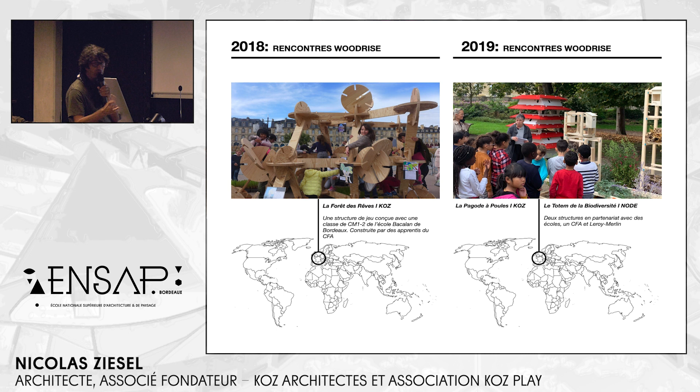Ça commence en 2017 avec plusieurs événements, dont déjà un workshop qui rassemblait des étudiants de l'ENSAP et des étudiants japonais. Ensuite, tous les ans, lors des rencontres Woodrise, des petits pavillons étaient faits, qui duraient une semaine dans plusieurs sites, avec à chaque fois un travail avec des enfants, que ce soit avec des enfants d'une classe CM1-CM2 en 2018, ou avec un collège et des apprentis en 2019.

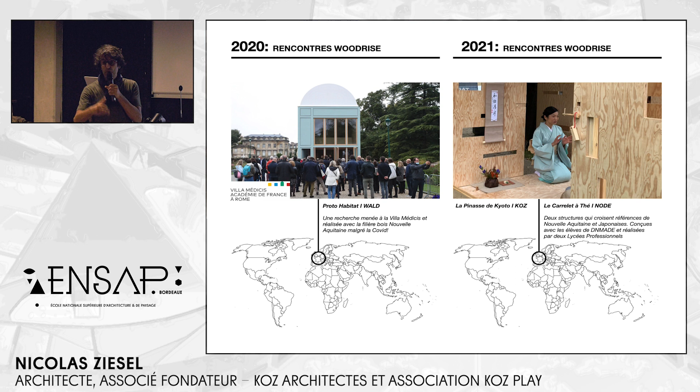En 2020, la rencontre avec la Villa Médicis autour de l'accompagnement par la dynamique Woodrise, par tous les acteurs industriels, ingénieurs, etc., de la construction du proto-habitat.

En 2021, à nouveau des pavillons réalisés avec des lycées professionnels, ce qui était aussi intéressant, et des étudiants en DNMADE d'espace. En 2022, on est parti hors les murs sur 3 événements.

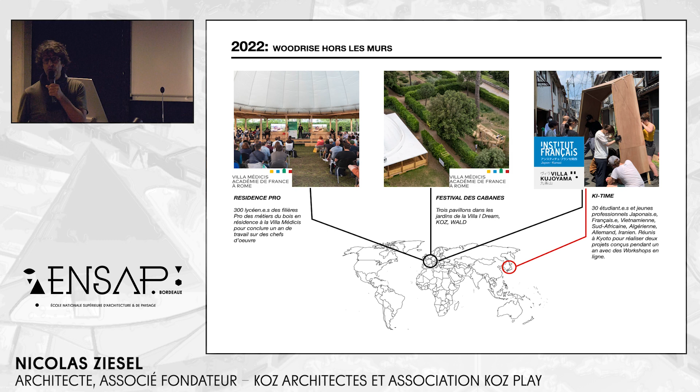Le gros événement était la résidence pro, avec 300 lycéens professionnels de la filière Bois de Nouvelle-Aquitaine qui passent une semaine à la Villa Médicis pour exposer les chefs-d'œuvre qu'ils ont réalisés pendant l'année.

Le festival des cabanes avec, grâce à tous les acteurs, 3 pavillons construits qui restent pendant l'été dans les jardins. Et grâce à Riichi qui est ici, Ki-Time, qui aurait dû se tenir pendant le congrès Woodrise à Kyoto, mais qui a dû être décalé pour les problématiques de visa.

Et à nouveau, des étudiants du Master Bois de l'ENSTIB de Nancy et des étudiants de plusieurs universités japonaises qui, pendant 15 jours, après un an d'échanges et de travail de conception en visioconférence avec le décalage horaire, assez acrobatique, réalisent 2 petites installations dans des lieux culturels français, à l'Institut français et à la Villa Kujoyama, une des résidences d'artistes de France.

Tout ça nous a amené, pour le retour à Bordeaux, à vouloir faire à nouveau accompagner le congrès par un événement de rencontre entre jeunes autour d'un projet, avec évidemment la dimension internationale de Woodrise.

Les participants viennent de 3 pays : des Français de l'ENSAP, des Compagnons, des Japonais et des Ukrainiennes qui ont réussi à venir passer les 15 jours avec nous, et qui vont maintenant vous présenter par équipe. Les équipes étaient toujours mixtes.

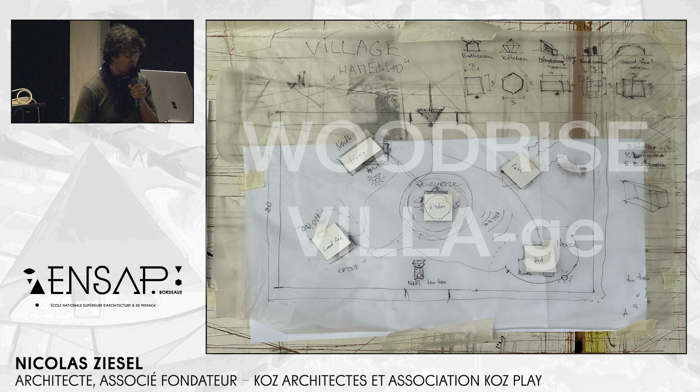Le sujet, c'est à la fois une villa et un village. Vous avez pu voir le petit village dehors, puisque chaque équipe a travaillé sur la thématique d'une pièce spécifique d'un logement, pour essayer de trouver une approche originale, adaptée aux situations d'urgence, ce qui a été un gros sujet avec les différents participants.

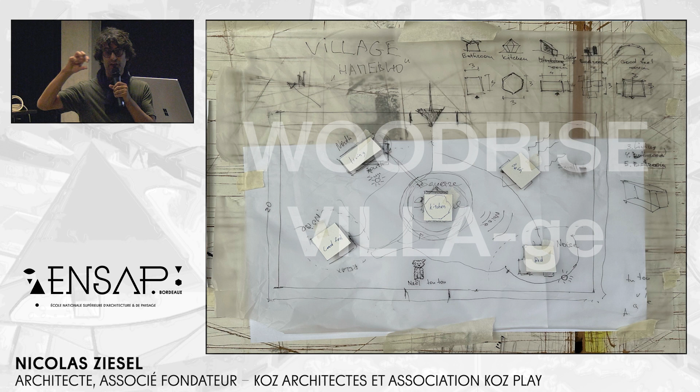Et puis à la fin, composer un petit ensemble habitable et peut-être transposable. On a déjà prévu la phase suivante, qui sera la réalisation d'une ou de toutes les propositions, pour les exposer à nouveau à la Villa Médicis et vraisemblablement aussi dans des communes des Landes touchées par les incendies. Alors on laisse la parole aux vraies vedettes du jour, qui sont les équipes.

Le workshop s'est tenu en 2 endroits. La première semaine, on était accueillis à la Philomatique, magnifique endroit, superbement situé, où on s'est senti très très bien. Et on a passé la 2e semaine, depuis lundi, à l'école d'architecture de Bordeaux, où l'accueil était tout aussi formidable, et grâce à la météo, des conditions absolument exceptionnelles de travail.

Alors, c'est à vous, je vais appuyer et c'est parti. Yes.

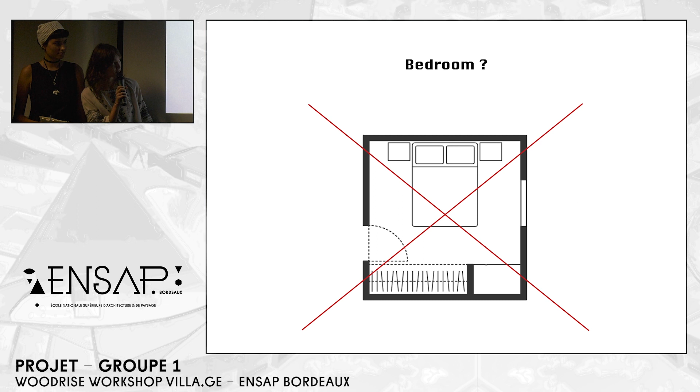So we are a team called Oui, Je, Maybe - that means yes, no, maybe, this is our name. Our team is from Japanese students, Ukrainian students, and French students. So we have different nationalities, different visions, and different experiences. This was a question: how to mix all of our cultures. The first question was, what is a bedroom? The average person would probably say that a bedroom is just 4 walls and a bed inside. But we decided to say no to that simple bedroom.

We tried to play with different levels in this main volume, and play with different layers. So the modularity is about making changes, and depending on the place, if it's a big gymnasium or a few small rooms, you can adapt the space using our modules. It's like an IKEA scheme that you use, making whatever you need for different families, different people, different cultures.

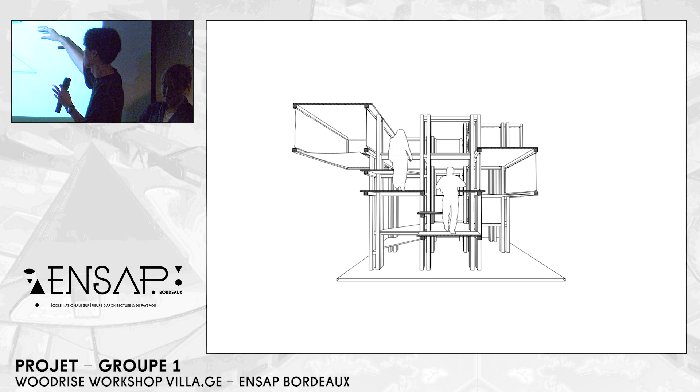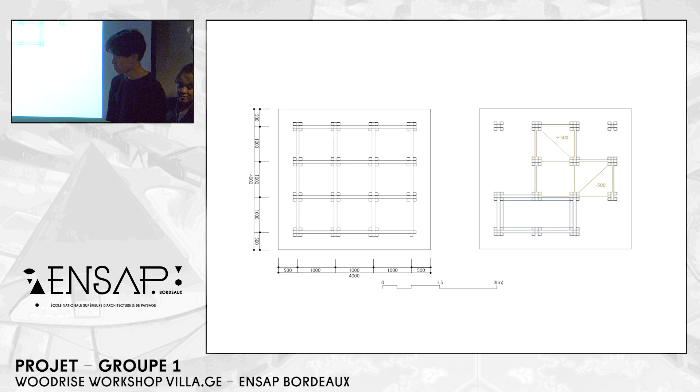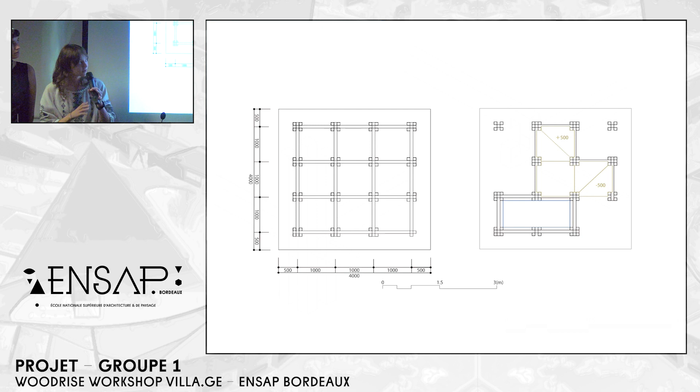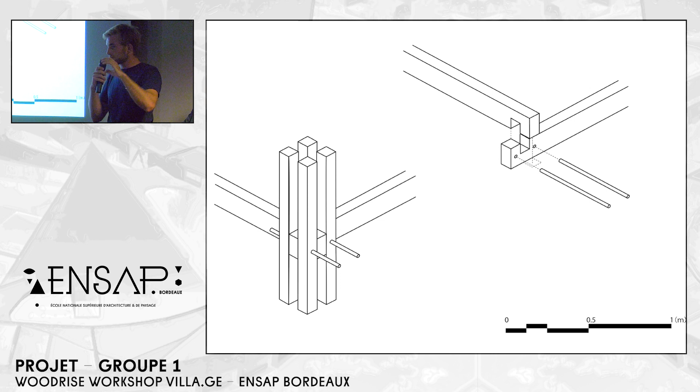This is a detail about the construction of the main elements. It's all the same poles and the same pillars, and it works one way or another, so you can use an element and use it somewhere else. The idea is to be able to construct it with only a few tools, and it's pretty easy to do, even at scale 1. It's pretty easy to cut and build at a large scale and with big series.

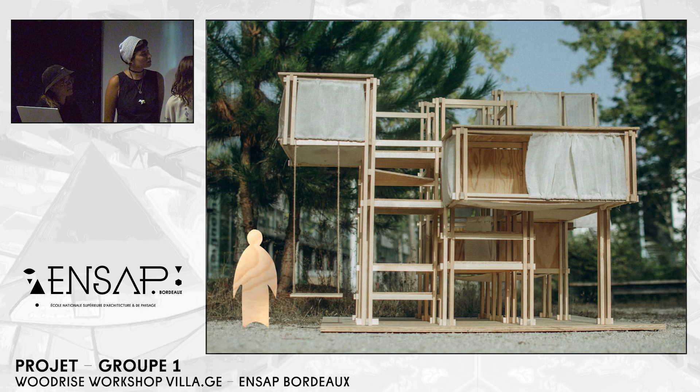This is Michel, the resident of our bedroom for now. I think he is enjoying our space in our bedroom. He can use it however he wants. Here you can see the different spaces that we created. That's not us anymore, okay. No, Michel, thank you.

In emergency situations, quick response to disaster is crucial. So we went back to the roots and tried to think about how to satisfy basic people's needs with as little intervention in the existing environment as possible. So we are ready to present our project.

Our team is composed of different students who come from different countries and different studies. We shared experience together and brought our own knowledge to add diversity to our project.

On the 24th of February 2022, the war began in Ukraine that changed the lives of Ukrainians forever. We have chosen this context because this topic is very current and requires immediate resolution, because many residents of Ukraine have lost their homes.

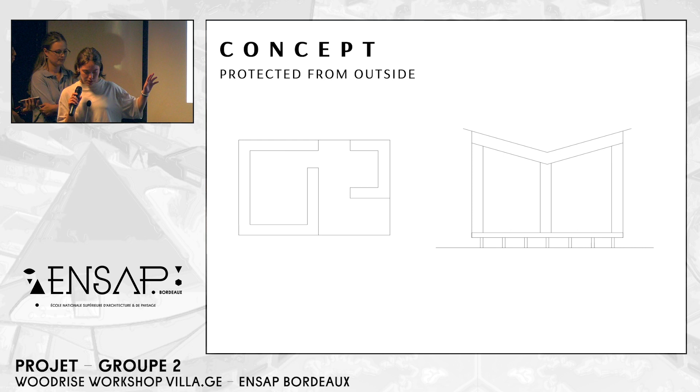The roof not only collects water but also provides light and energy. This form of roof facilitates the collection of water. In the shower area, there is a cutout in the ceiling that provides light, and on the roof.

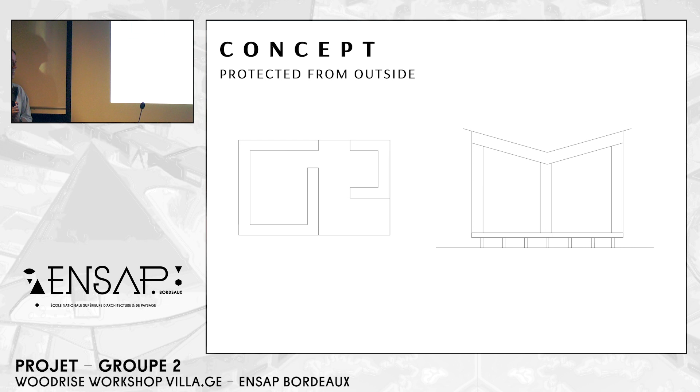To protect the room from outside, we use straw in the walls and roof panels. Straw is a very common resource, and it's also good for insulation and humidity regulation.

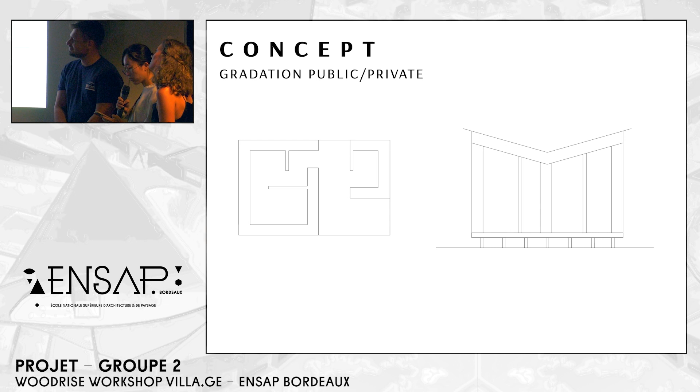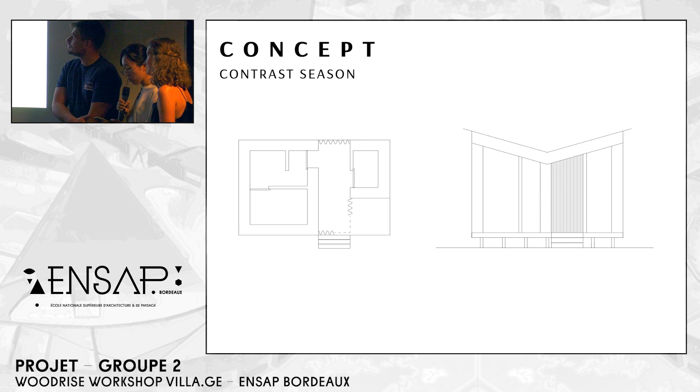As we explained, weather changes with the seasons, so we use some removable walls. In summer, we put away the walls to make way for wind and light. In winter, we close the transparent room and hold the warm air. Only some doors can be opened.

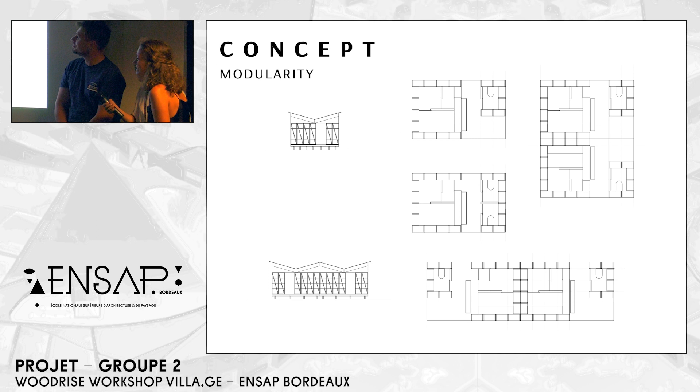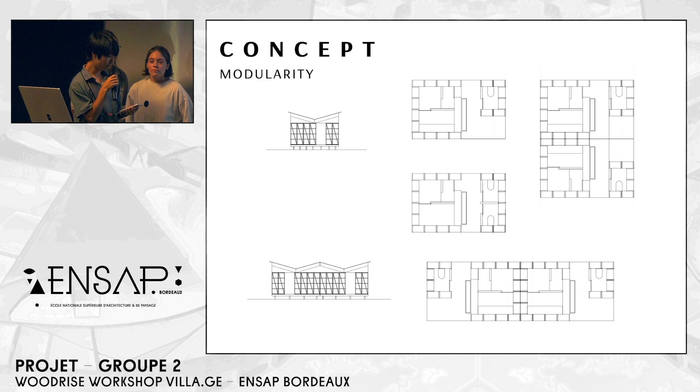We modularize the building by using wooden blocks as walls. We have made it possible to place the required number of toilets and bathrooms. Our building can adapt to many situations.

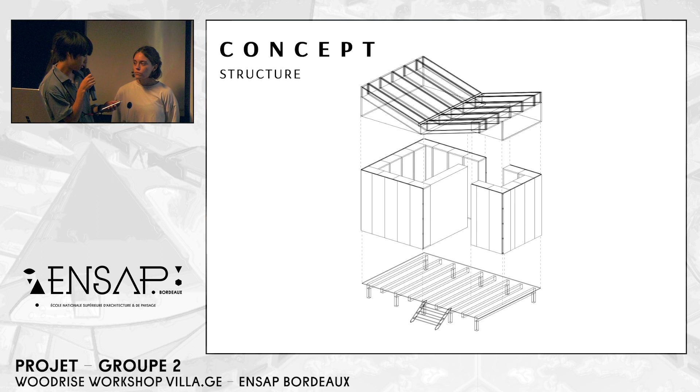The structure foundation is lifted off the ground and the floor is isolated. Wall straw is used as isolation and adapted to protect the wall. We cover it with recycled plastic on the exterior and an interior wall, a gray interior wall.

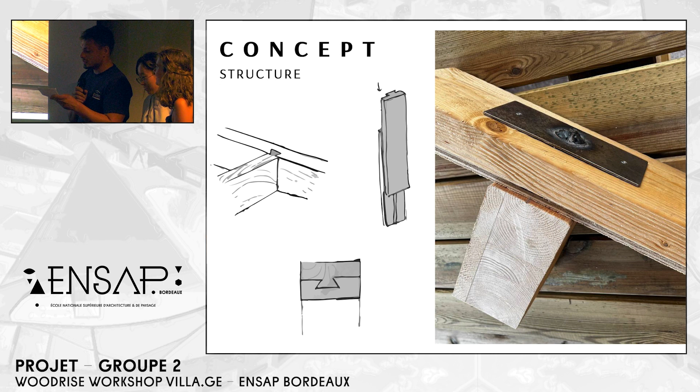Our structure is totally demountable. We have used metal junctions. The walls are fixed on the floor with wood. Between walls, we have a dovetail joint, and the wall panels are joined by dovetail too.

Our buildings are inspired by three different countries. The use of straw for isolation is common in Ukraine. The wooden structure is built using French traditions, and the removable walls remind us of Japan.

The main idea is to make a comfortable place where you can relax after a hard day. So we decided to apply the snail principle, as we call it: the closer to the shower, the lighter and warmer.

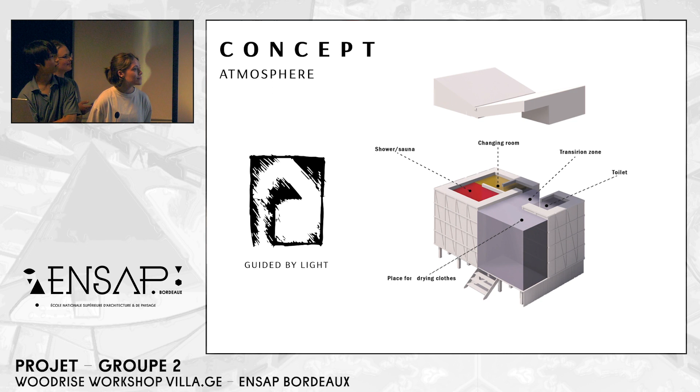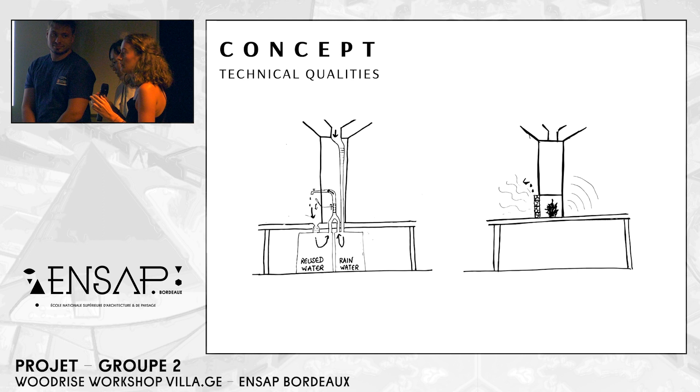The goal was to consume less water, so we needed a cycle of water: we collect the rainwater, treat it, and reuse it. We don't have a usual shower because we restrict the volume of water, and we have a sauna to consume less water.

The idea is to consume less water, so we created a dry toilet that doesn't need water at all. You have this container, then you can empty it, make compost, and grow vegetables for your family.

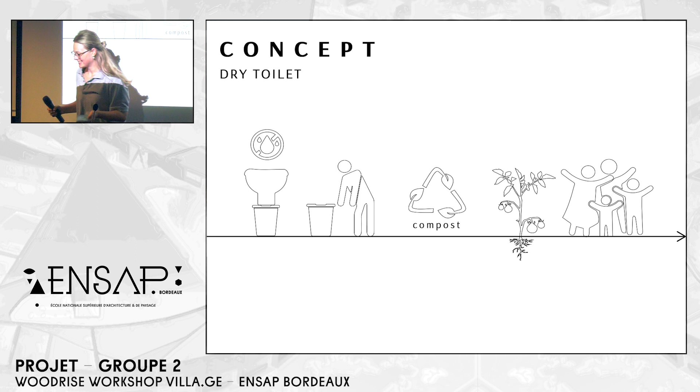The process was: at first we made some sketches and wanted to try it with our body, so we made a scale 1 plan on the floor. The model helped us solve some issues and have a concrete aspect of it.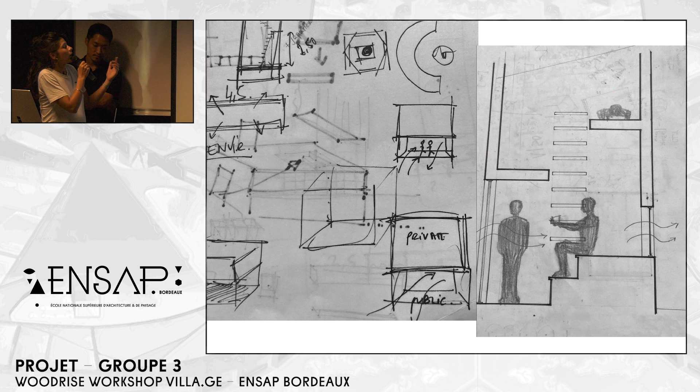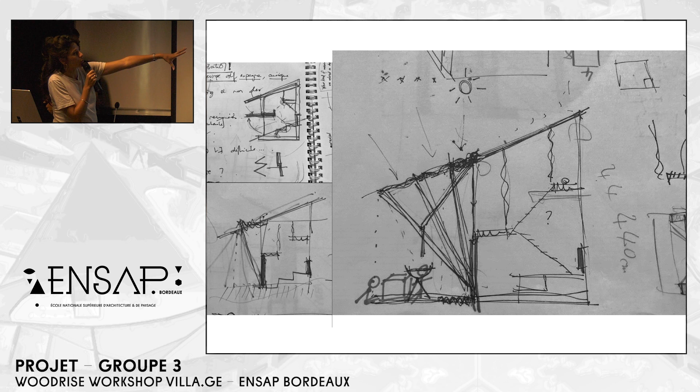The main idea we developed is that of an inside room, which permits sitting and talking on the floor, having a nap on the side or on top, and also being able to have shadow and enjoy time outside, taking into consideration sun and so on.

Then we worked a lot to define the way to have shadow outside, and also to define the architectural arrangement inside. We thought about the light and electricity system, and also the shape was moving a little bit.

So we arrived at this plan, which is inside and outside. You can see that we thought about insulation, and this is the external structure providing shadows.

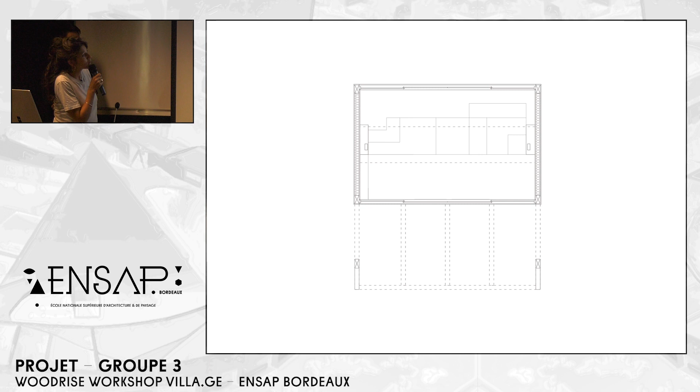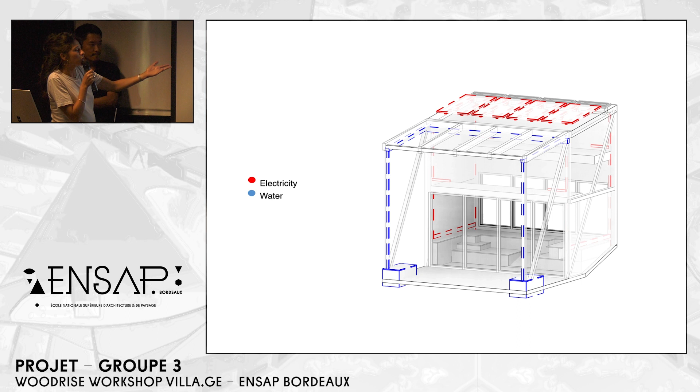The last element is that we thought about the sun for sure, but also defined an electricity system with solar panels to provide power to the people inside, and also a water system, which will also be a structural weight we need to maintain the structure.

There is a problem in Ukraine that people who lost their house in the war aren't always helped immediately. Some wait for help for many hours, and some for days, weeks, or even months. The spaces in Ukraine aren't in good condition, and sometimes people wait just sitting on the floor.

This is what our space is for, where people can relax, talk, and support each other while they wait for help. People can stay here not only for a few hours, but also for several weeks. So, to ease the waiting process, we created our project.

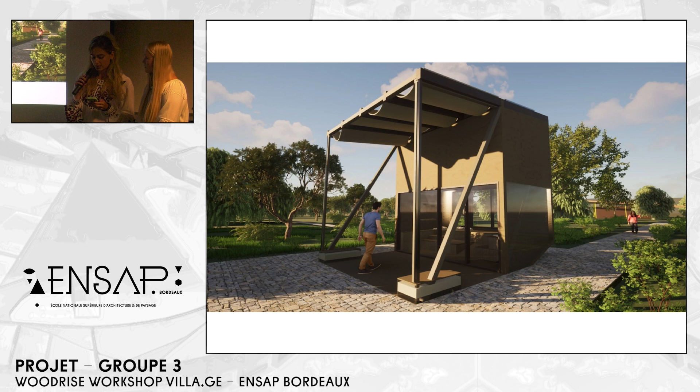Next, I will talk about how our room can be used. A person waiting for help can come to our living room and relax, have a snack, or take a nap. Almost all the space on the ground floor is occupied by a large multifunctional stair made in the form of an amphitheater. It replaces a chair, table, sofa, and wood boards.

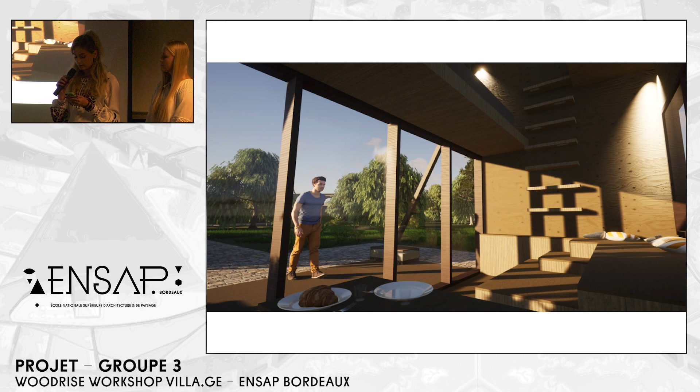You can go up to the bed by a vertical staircase. You may ask, how do you climb it? We made a hole for your hand in each step. There are 4 beds to stay in a private space alone with yourself.

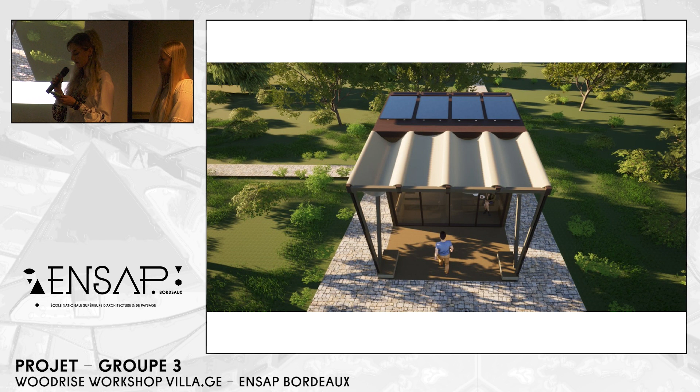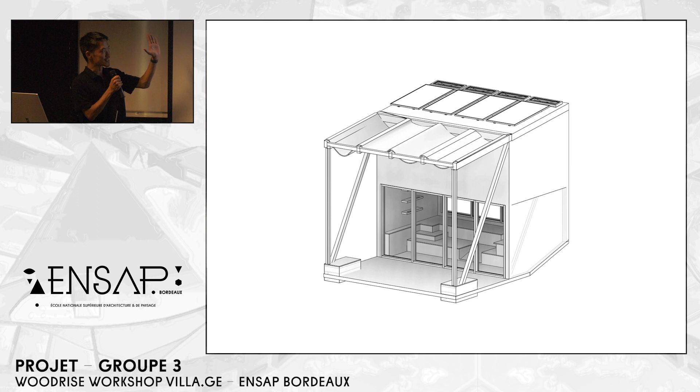This is our inside view, and we have our axonometric view. The most important thing here is that we have this kind of box, 2 boxes. Inside we put the water system, and also the water and rocks and stones, which work as the weight for the whole structure, avoiding it going this way. And also we have the axonometric diagram here. It's like a 4-meter high space that allows people to gather here and take a rest.

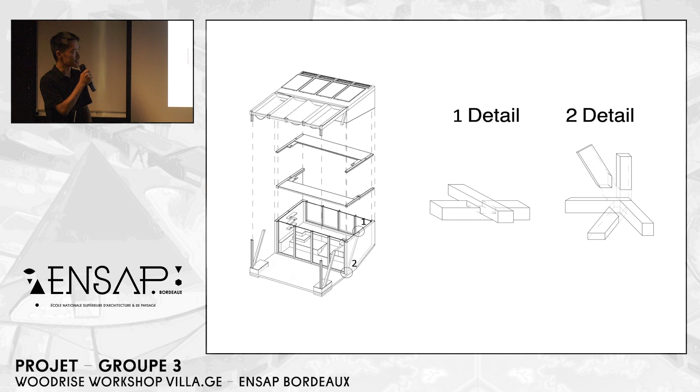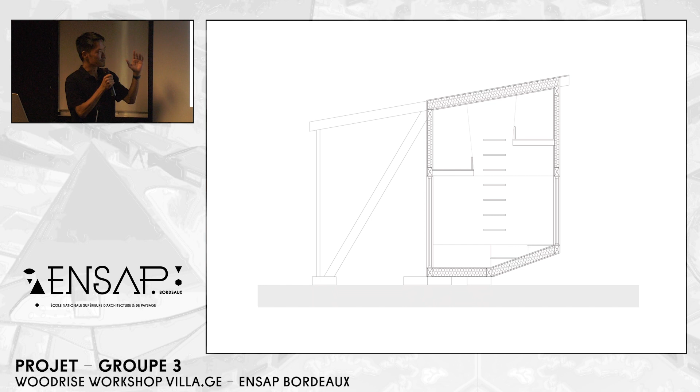Because of this height, we have this kind of structure detail, which Luc helped a lot with. And this is our section. Here we have different thicknesses for each material. Each material resists its own compression and tension, to avoid falling down that way.

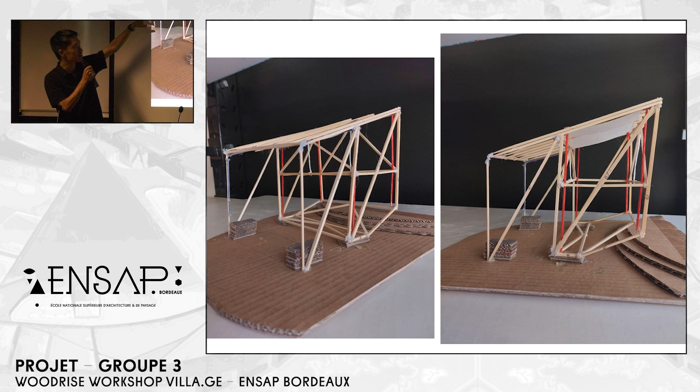And this is the initial model we made. Here you can see the red line is for how the electricity works. It's difficult to see, but here we have the water system to collect the water from the roof, and then we can use the water here.

And this is our project, and we have this picture.

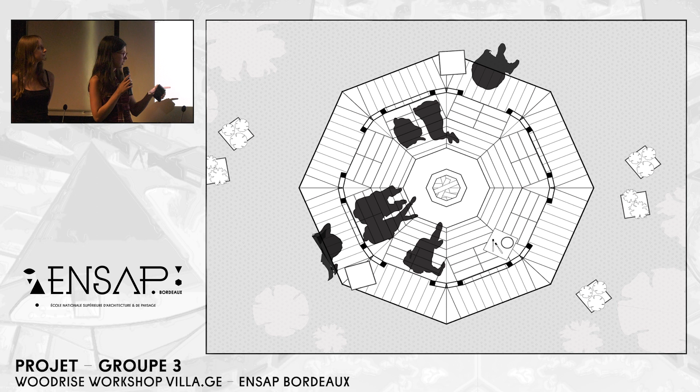The bench surrounds the fireplace, which can also be used to cook. There's also a connection between the inner and outer spaces, and people can freely move from one space to another. The outer bench that goes around the whole building is inspired by the Japanese engawa. It can be used for people who want to enjoy nature and just think about their own thoughts.

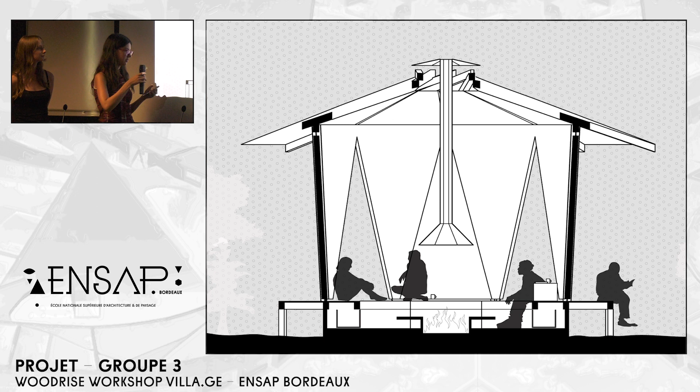Our kitchen is divided into 4 elements. The first is the fireplace, which allows us to cook and bring things to it. The second element is the bench, which has a hole in the middle to allow us to sit, have a nap, and also cook.

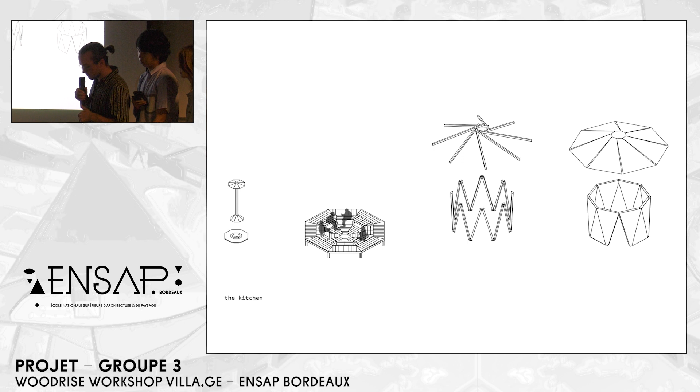It's really close to the fire, and to cover that, we have the walls and the roof. The roof is a reciprocal structure, so each beam supports each other. This way, it's a very vernacular structure and really simple to put together at the construction site.

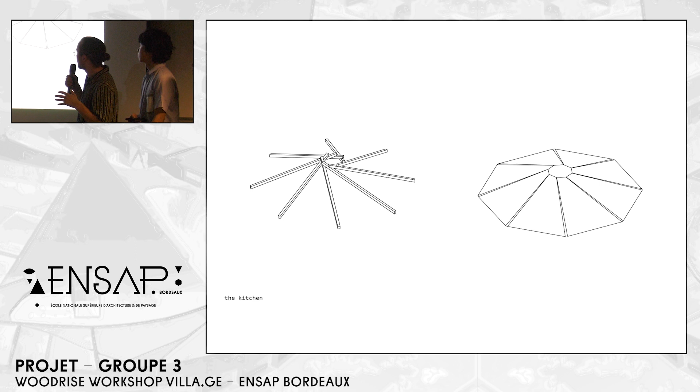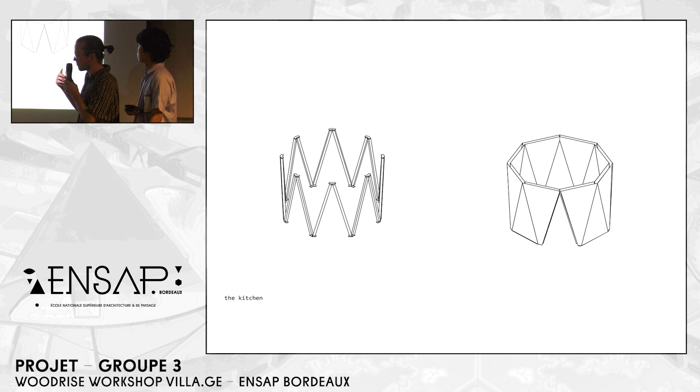We also have a cover by membrane to protect from the rain. For the columns in the walls, we use the same piece of wood - all these columns are the same piece of wood, and they are all connected with the same metal connector. They also follow the same principle as the roof, protected with a membrane. We double it and cover it to have insulation.

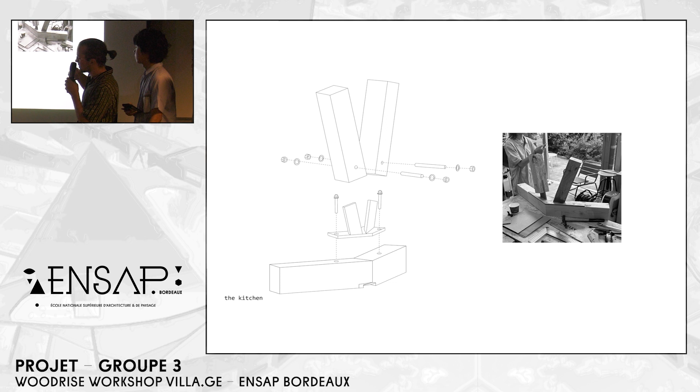The metal connectors are always the same, so we put them on the beam and connect like that. This way, we use the same method all the time, allowing for simple actions at the construction site.

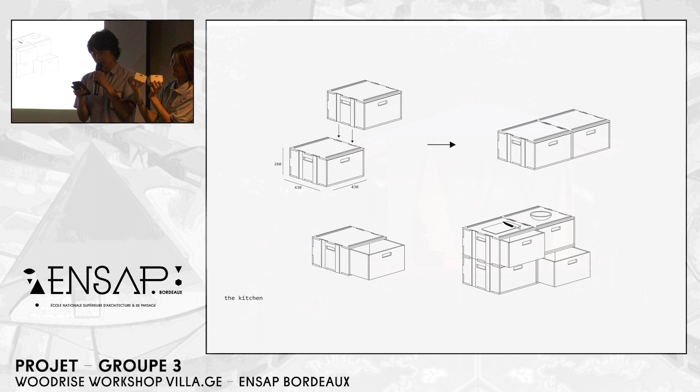In addition to the building, we designed a modular box system. The 16 boxes fit perfectly underneath the benches, and they can also be stacked and connected with joints. Users are free to choose where and how to use them - for example, they can stack them to make a table for cooking, bring them outside to use as stairs, or just use them as storage.

At night, the light goes through the membrane, revealing the structure as well as people socializing inside. Our building with fire will be essential to the refugees, as it turns into a place where people feel invited, get warm, socialize, and heal. Thank you.

For introduction, we would say that during emergency situations, we always act under stress to find solutions. Traumatic situations, like war or climatic disasters, bring trauma that can stay in the mind for a long time, sometimes forever. We wanted this project to create a place where people can forget a little bit about these bad thoughts and feel themselves in another world.

Our team consists of 5 people: Felix, French; Elizabeth and Sandra, Ukrainian; and Showa and Naina, Japanese. We have successfully managed to blend all of our different ideas, as each culture has its own unique architecture. Working together in an international team has been a great experience. Sometimes our opinions differ, but we always try to find common ground.

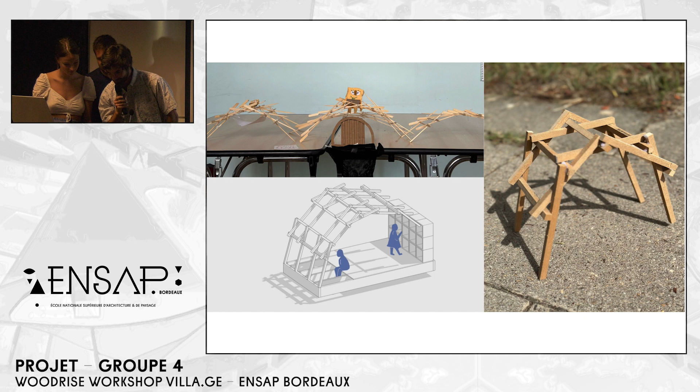This place has turned into a big humanitarian hub for people who flee the war. This hospital doesn't just fix their bodies, it also helps them feel better mentally after everything they've been through. It's a step between the hospital and coming back to normal life.

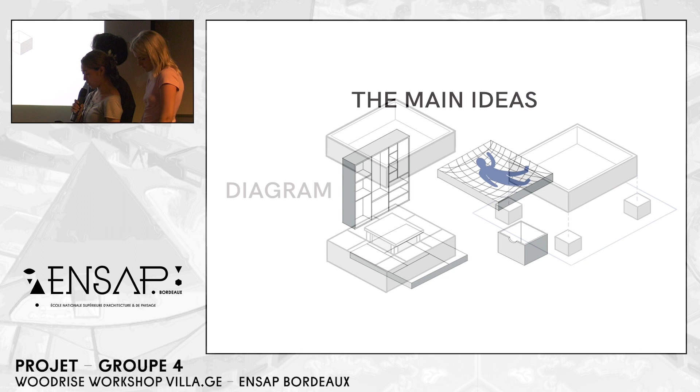We tried different models and designs, like the arch from Leonardo da Vinci. It was hard to fit our privacy principles into an open structure like that. Instead, the cube became the simple basis of a closed space, a shape that's easy to build and can easily fit into any environment because of its simplicity.

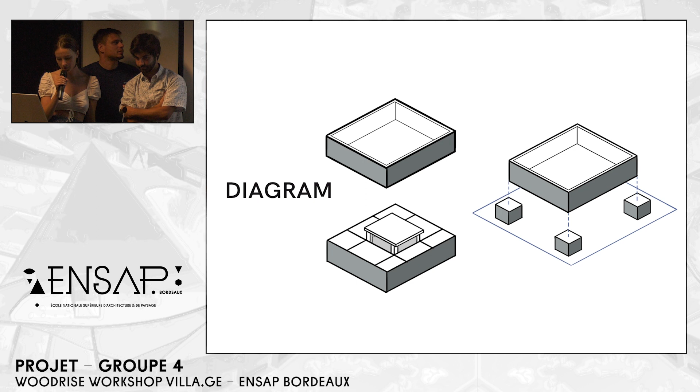Our main ideas were shelves for storage, a comfortable floor, and a net for laying down. We wanted a place where the functions can change, where people can appropriate the space they need with simple furniture.

We tried a lot of configurations and finished by hiding all of the main ideas into the floor. So the main concept is a very thick, adaptive floor from where you pull out what you need to create your own space.

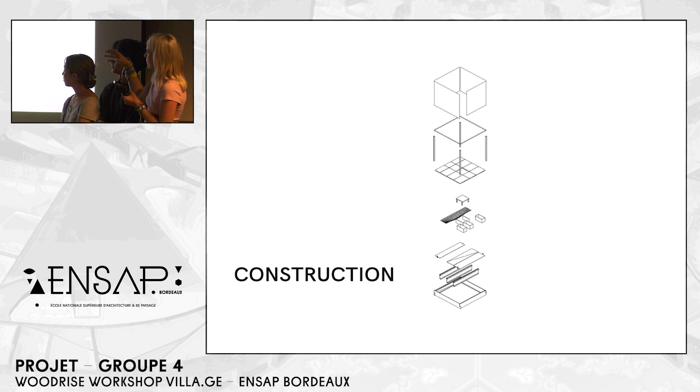For the construction, we used a system like Lego, so each part can be put up very easily by people at any moment they need. The structure of the walls can be hidden inside the floor, and you just pull it up if you need a private space. Inside the floor you have the shelves, the net, and everything you need.

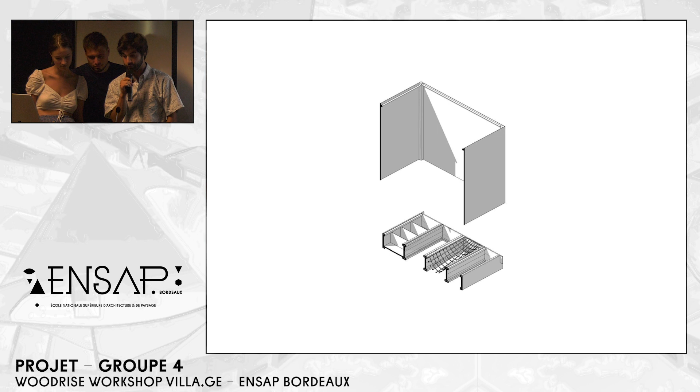By using traditional principles of architectural construction from various cultures, we used the Japanese tatami floor scheme. When necessary, a person can remove some tiles in the floor to get a chair, a table, or access to a net.

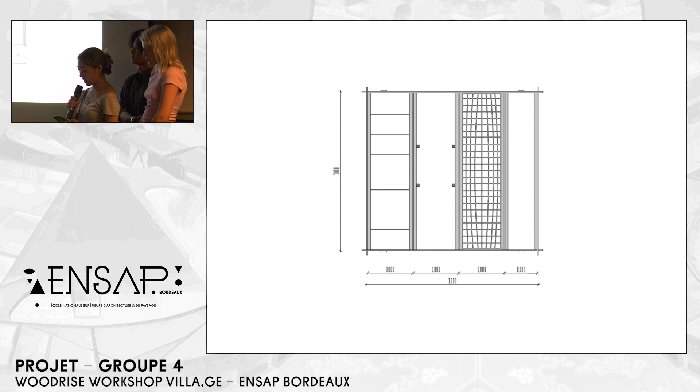It's a construction built as lightweight as possible. Our goal is speed of construction, simplicity, physical comfort, and minimum resources. We achieve this through the use of I-beams made of plywood with traditional Japanese joinery.

The floor is separated into four spaces: one for technical storage like columns and curtains, one for the net, one for the table and a few shelves, and one full of sliding shelves. This configuration could easily change from one cube to another.

Our task involved timber construction. We also opted for fabric for the walls due to its affordability, ease of use, and adaptability. It lets in natural light while preserving privacy, an essential part of our ideas.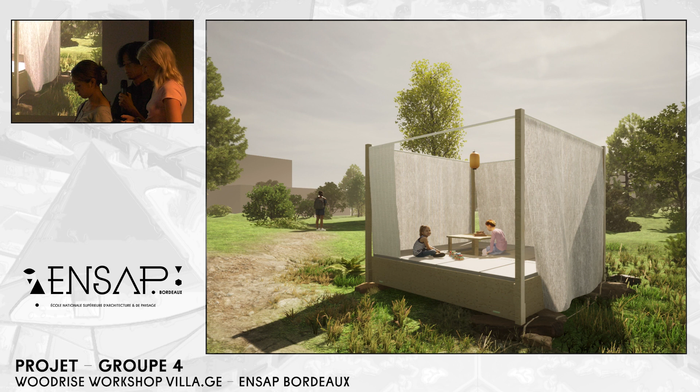The floor is also made of fabric for added comfort. To hold the curtains, we use lightweight metal pipes, making it easy for individuals to assemble the structure themselves.

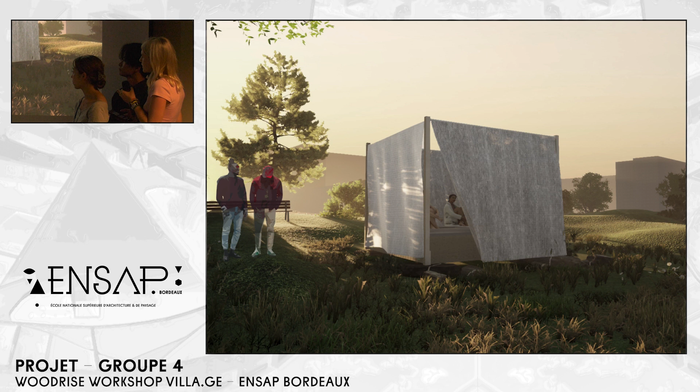The simplicity and minimalism of our structure allowed us to design it for anywhere. During cold seasons, you could put it up inside a building or pavilion, like inside the hospital, for example, and it can be used by anybody.

In its usual state, our project is a closed and concise platform, and when assembled, a cube with minimalism, strictness, and clean lines, which translates into versatility. We also use calm colors and shapes inside to create a better sense of comfort. Thank you for your attention.

So thank you very much, and I hope for all the participants that they will never forget what was my main obsession with you: that true freedom is being without anxiety about imperfection, because there are still many steps to go, many things to learn, and many other possibilities. So please go on with all what you have done until now. Thank you very much.